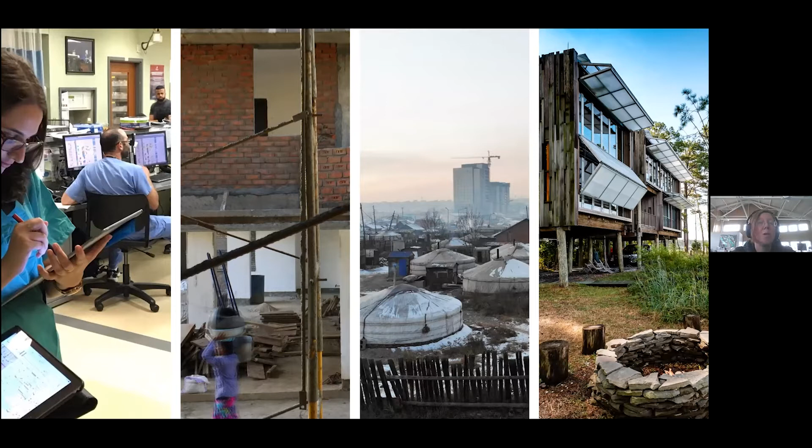So today I'm going to provide a very brief overview of the practice of KieranTimberlake. And I'm going to use 4 projects to discuss aspects of expanding our design agency through inquiry, which is why I titled this Research and Practice. But it's really expanding our agency through inquiry with a focus on outcomes. So these 4 specific projects really try to focus us in on what architecture in space can do.

And then I'm going to end by framing about 4 questions for discussion, and maybe really what I'm doing is I'm taking these 4 questions and lumping them together with your set of questions for a broader discussion.

So just a little bit about KieranTimberlake and how we're organized. As Billie mentioned, we are a transdisciplinary practice. We're known for architecture, but also for novel envelope concepts, creating hardware, software applications. We're also known for the analysis and studies that we do. We're known for basically creating knowledge for architecture, in addition to creating architecture. We've built a culture of inquiry, and we've established research as a project that requires strategic planning of people, time, and money to do that research.

Our research questions absolutely reflect an expression of how we think about design, architecture, and our agency. I say that specifically because inquiry as a mode of design is the underpinning of many practices, and it's deeply connected to design philosophy. We have matured a multi-methods approach that includes measurement, surveying, mapping, modeling, simulation, and prototyping. Those are all methods that we can use, connected to tools that we can use, but really our focus is less on the technical and more on the social aspects, recognizing that the technical is just something that we use to get to very, very specific outcomes for people.

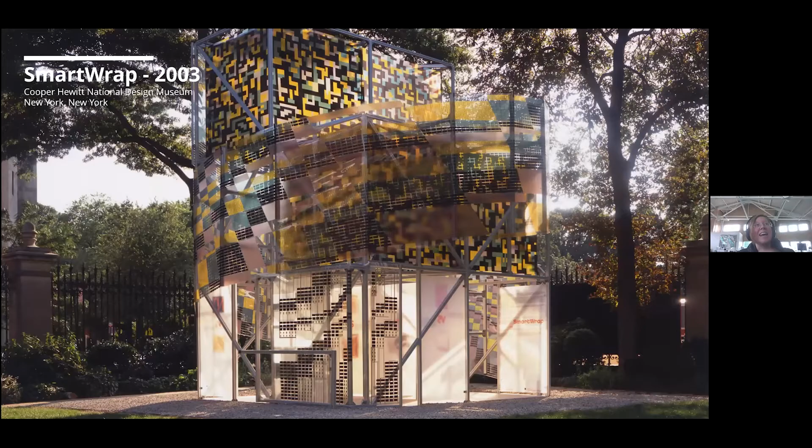Projects such as the US Embassy in London, and I'm going to go back in time a little bit here, the Cellophane House in 2008, and SmartWrap, represent more than a decade of connected research into the efficacy, adaptability, and performance of multifunctional facades. And projects like Multi-Scale Modeling or Ortlieb's Bottling House or Green Roof Vegetative Survey also embody our commitment to establishing proactive research test beds. You'll see that those projects are projects of ours, and we're trying to understand, explore hunches, and really deepen our understanding of the relationships between people, architecture, change over time, as well, again, as the efficacy of our design strategies.

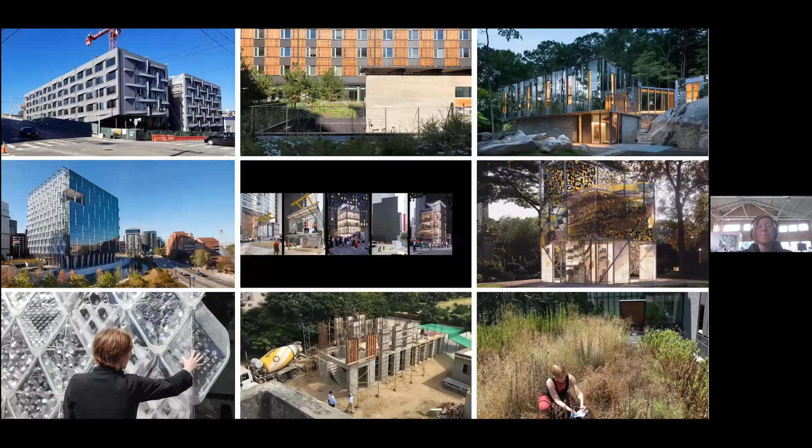And each one of the 9 projects I've just briefly mentioned, in whole or in part, represents the purpose and pace of inquiry in our practice, where day by day, we leverage inquiry to develop actionable insight into design decision-making. Month by month, we have processes here for proving new concepts that have the potential for practice transformation. Year by year, we develop new knowledge on the built environment through longitudinal studies where we set up projects and we study them over time. And then platform by platform, we choreograph new workflows that elevate our profession.

So today I want to discuss in a lot more depth than what I just went through. I want to really discuss 4 projects. I've picked these projects because I think they express aspects of our agency to engage inquiry in order to design for resilience, design for health and well-being, and to address climate action. These projects include emergency department occupancy mapping, Ideal Choice Homes, designing the 21st century care, and Tally, which is a software that models embodied carbon. I've selected them because they also express a need for transdisciplinary or inquiry-based design and a specific investigation into approaches for transdisciplinary and inquiry-based design.

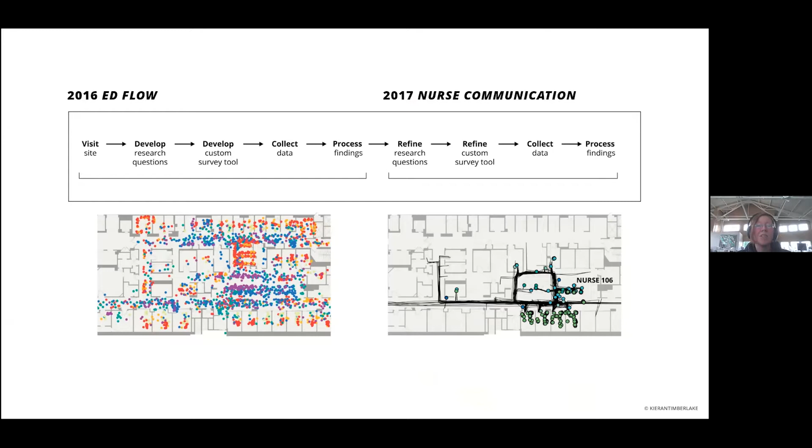Right around 2016, KieranTimberlake and Jefferson University's Health Design Lab formed a 2-year research partnership to examine this space that you see pictured here. It's an emergency department in Center City, Philadelphia. And you can imagine that this is an incredibly intensive, 24-hour driven space. And we were interested in understanding the experience of people in the emergency department, but we were really interested in understanding the environment that was there, the interface between nurses, patients, and physicians, and the overall experience of people in this space.

Caregivers here were concerned with the flow and function of the emergency department. So with the movement of equipment, location of individual rooms, circulation patterns, and overall ability to adapt to events.

In many ways, this was a found space. It's not a space that we designed. It's not a space that we planned in any way. It was a space that was really offered up as a space that needed some further study and a space that was being questioned along the lines of, does this space meet our current needs?

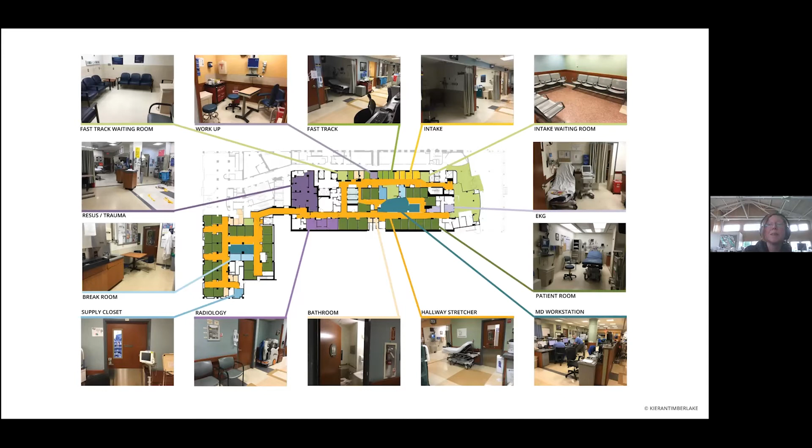So a little bit about the Health Design Lab. I think what's important to know about the Health Design Lab is this is a lab that is specifically set up to connect future doctors and caregivers to design thinking. So they work with a range of different professions, industrial design, architecture, public health, and look at the ways in which design thinking can be used within the field of medicine and caregiving.

And in this instance, we work with a team of medical interns, and we organized and built capacity for us as a team, architects and medical interns, to collaboratively survey and study the emergency department. So our ambition was to provide a new way to see the emergency department and to identify opportunities to improve it. And then a secondary goal was to understand the potential for rethinking the emergency department more broadly.

So we developed a tablet-based workflow where data was collected, it was structured, stored, and then analyzed using digital mapping tools. The survey was conducted amid the movement of people, equipment, as well as furniture and shift changes within the emergency department. And we used a geolocated set of floor plans that allowed for surveyors to zoom into maps and manually place individuals in space without relying on GPS.

Well, there's a number of types of technology that might allow for this kind of tracking. They weren't allowed here in this space. And so much of the work that we did to overcome these technical challenges had a lot to do with trying to find a workflow that fit this place to do the kind of surveying that we wanted to do.

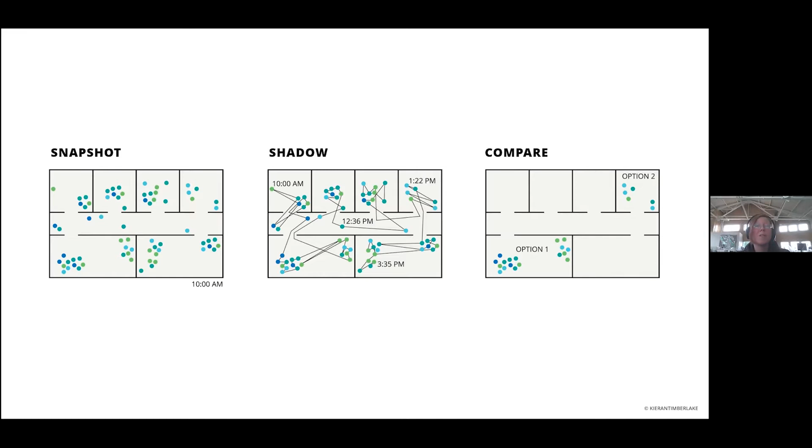We deployed 3 different survey approaches and then attached additional metadata notes or photographs to these individual data points. So for instance, a single point was used to represent the location of a stationary individual, while a multi-point line was used to represent the path of a moving individual. We also formed quantitative comparisons between different spatial configurations.

And with these methods in place, we were able to do ultimately what we wanted to do, which is to conduct research through targeted study questions, such as how does the occupancy in the emergency department change over time? And by mapping this trend, hospital staff gained a more holistic understanding of the emergency department. They were able to confirm the stories that they kept telling each other. They were able to confirm areas of congestion and identify opportunities for increased efficiency.

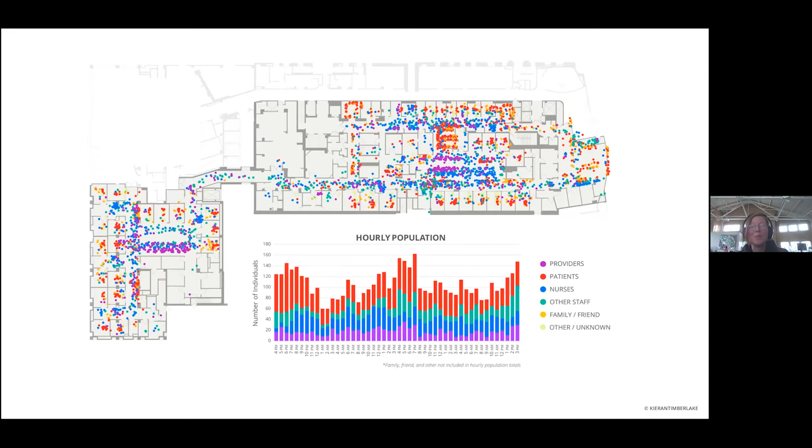And for instance, with this kind of data, the staff reimagined a replaced waiting room and a new placement for a waiting room in order to reduce congestion and patient wait times. We were also able to explore the question, what is the relationship between environmental conditions and patient experience?

So medical interns used a shadow approach. They tracked individual patients through the emergency department to understand a patient's experience over time. They simultaneously measured factors like temperature, humidity, light, and sound, and they were able to show variation in the environmental conditions per space type over time. And this mapping exercise revealed that some spaces in the ED were quieter or warmer than others, suggesting design improvements for better patient placement.

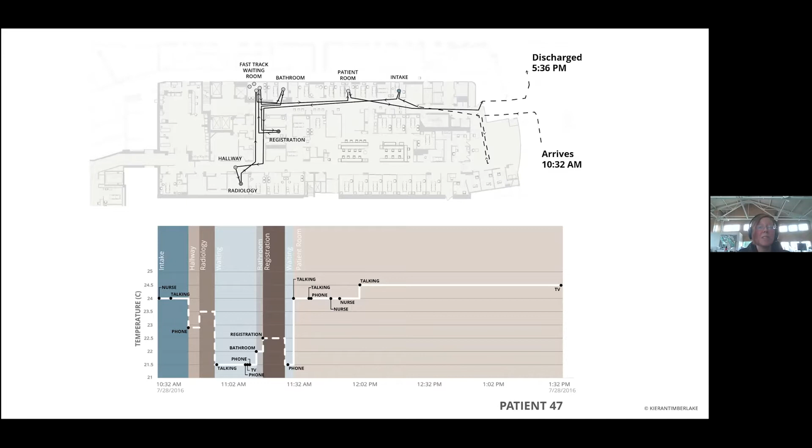And then finally, we explored the question, how is communication affected by different spatial arrangements? I should say that this question arose out of the first year study. So we did a field experiment in the first year in 2016, asked the two questions I just sort of posed to you, and then we were able to back up and say, what next? What else could we learn in this space?

And we really began to understand that there was a central question and desire to know something about how people communicate with each other in this space. What was interesting here is that we were looking at not one space, but many space types, and predominantly those space types being planned according to two different paradigms. So the emergency department is divided into two wings. There's the A side and the B side.

And the A side centralized layout concentrates a cluster of nurses and doctors in a workstation surrounded by patient rooms, whereas the B side's decentralized layout and individual nurse stations distance nurses from other hospital staff in order to situate them closer to patient rooms. So if you studied healthcare design or have some familiarity with these types of layouts, you can see that both of those types of layouts are connected to best practices for patient care.

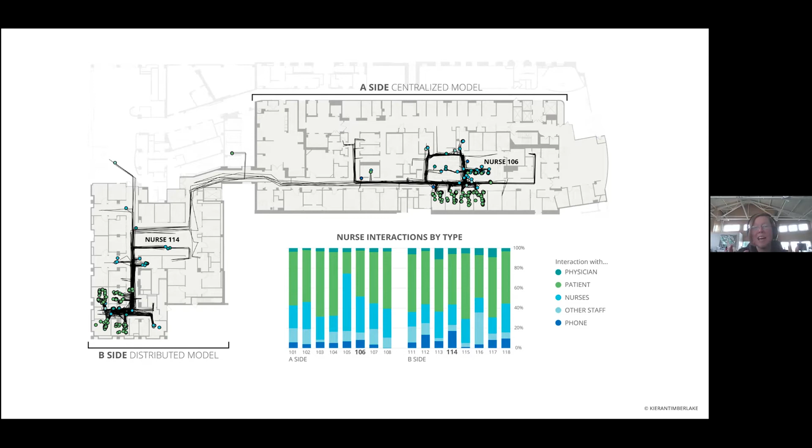The mapping that we did, which was paired with some statistical analysis, revealed that on average, the B side decentralized layout led to increased communication and contact time between doctors and nurses, despite the distance between their workstations. And that finding was, again, a finding that allowed this community to begin to have more explicit conversations about space.

But what is it about this ED study that I think might be of interest for our discussion? So really what the ED study does is it demonstrates some resilient design principles, but it also demonstrates that the emergency department and spaces like this are dynamic. This is an event-driven space, and it has to adapt to serve people with acute needs. And the recent need to meet social distancing guidelines and to separate COVID and non-COVID patients placed an even higher premium on the flexibility of this space.

But this study also demonstrates that post-occupancy evaluation, or POE, is an essential method to help us understand how a space actually functions. And when we understand how a space actually functions, that could be a flywheel for adaptation and an input for design. It also suggests that non-experts, building owners, students, staff, can be empowered to conduct research on their own space and to identify areas for improvement.

In this study, it was the medical interns and two doctors leading the medical interns that ultimately were leading the study inside the space and doing all of the surveying. And that was in partnership with deep discussions that we were having where after collecting that data, we would all get back together and really try to understand the meaning of that information. But nonetheless, it points to that need to empower people to really understand their space.

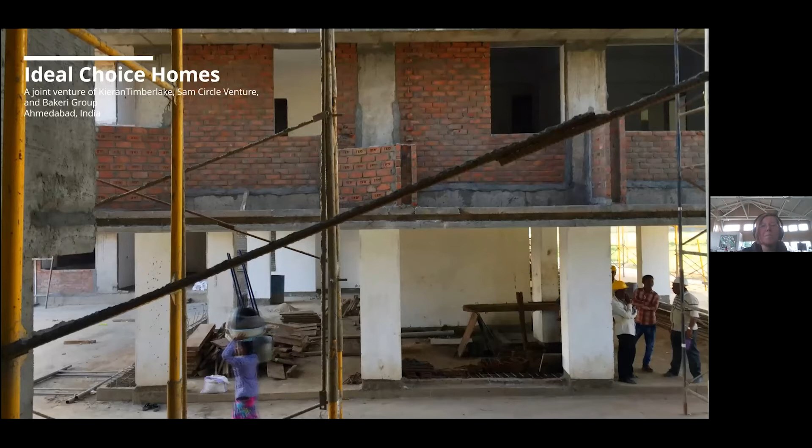The next project I want to talk about is a project called Ideal Choice Homes. This project was done in partnership with Sam Circle Venture out of New Delhi and Bakeri Group out of Ahmedabad. And this project addresses a significant housing shortage throughout India's cities. We started to engage this project in 2010 and worked on this project between 2010 and 2018. Really, in this project, the chief challenge was to look at existing construction technologies for single and multifamily housing and trying to understand the evolution of those construction technologies.

Some of the observations that were made by our partners had to do with the employment of wet masonry infill that was prolonging completion up to 24 months. And that prolonged completion was unable to keep up with the significant shortage of housing. We were also looking at material supply chains and construction technologies that likewise couldn't keep pace with demand. So in partnership with our India-based asset management company and development company, we aimed to design and engineer a whole building system solution. So this was very much about looking at building and construction systems to solve the problem.

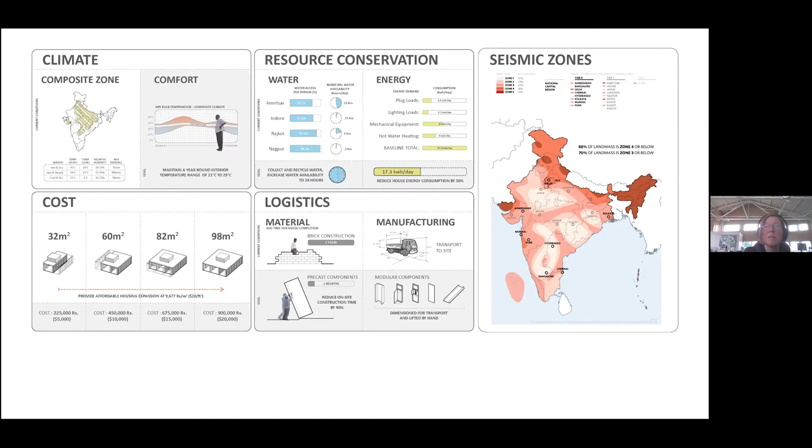The team's background research and analysis explored all aspects of India's offsite fabrication industry, including supply chain development, production capability, as well as housing and construction typologies, familiar room use patterns, material availability, seismic and air pollution risks, as well as labor and more. And the primary component of the system is a precast C-shaped concrete panel that has multiple integrated functions. It works both as a wall and as a column, as permanent formwork. It's dimensioned to allow reinforcing configurations for different seismic zones. And it's also dimensioned to self-shade from sun and monsoon.

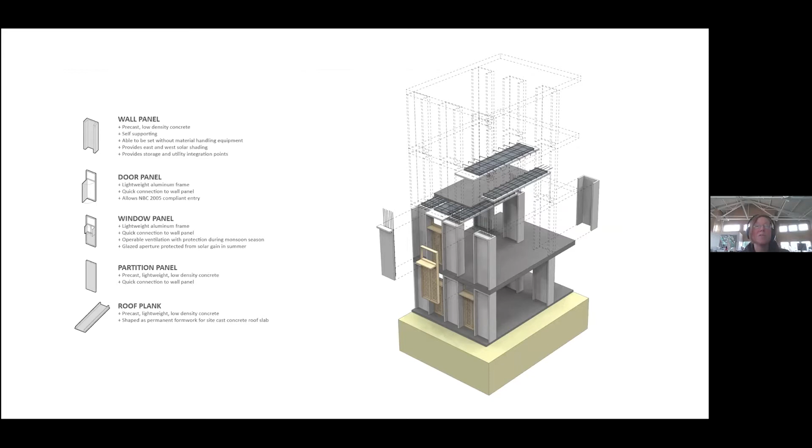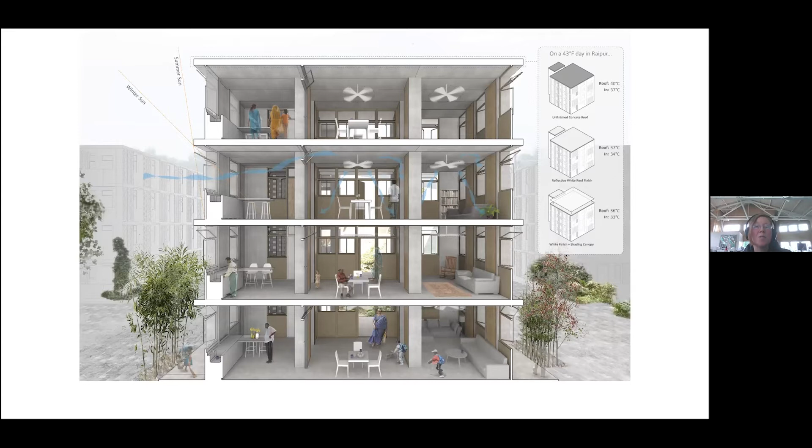And overall, one of the driving factors here was time, an attempt to reduce construction time from an estimated 2 years to 3 months by orchestrating a legible construction sequence. Likewise, we were looking at creating a system that could respond to a wide range of seasonal variation, minimizing solar gains through overhangs and shading during the summer, encouraging air movement through cross ventilation and minimizing air infiltration in the winter. And then also designing a system that could expand from a single bay studio to a 3-bay, 4-bay multifamily housing structure, and really engineering this system with our structural team as one that could anticipate further growth, such as the addition of a room or the addition of an entire floor.

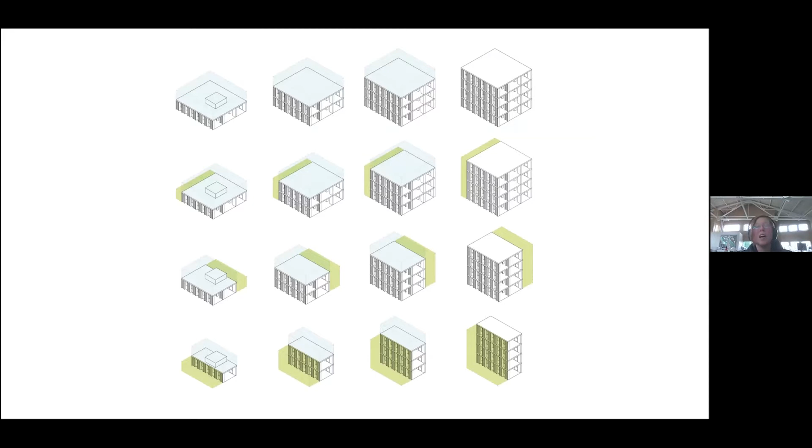So our development process emphasized a collaborative approach to prototyping, where we were prototyping here and with our partners in Ahmedabad. And we were addressing concerns about component weight, material availability, and fine-tuning several lightweight concrete mix designs concurrently with our partners.

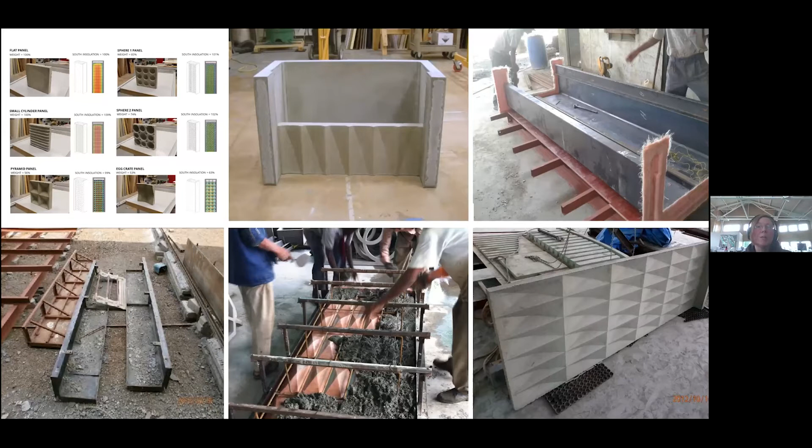We also were exploring formwork design, casting and demolding with small scale and high capacity precasters. So we were looking at the scale of production as well as the capacity to create these different elements.

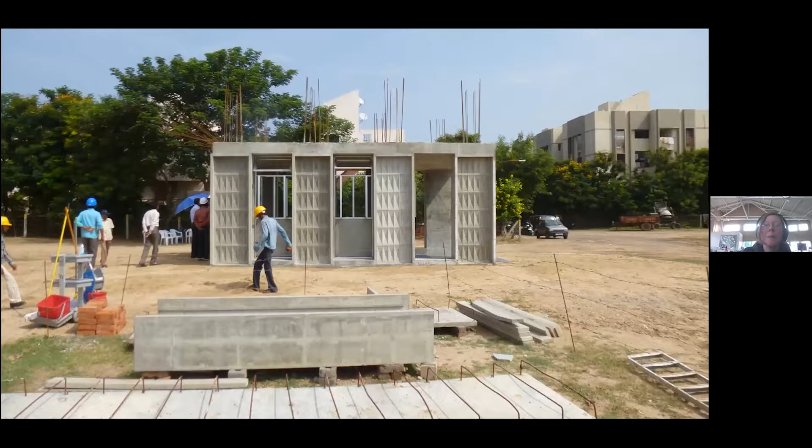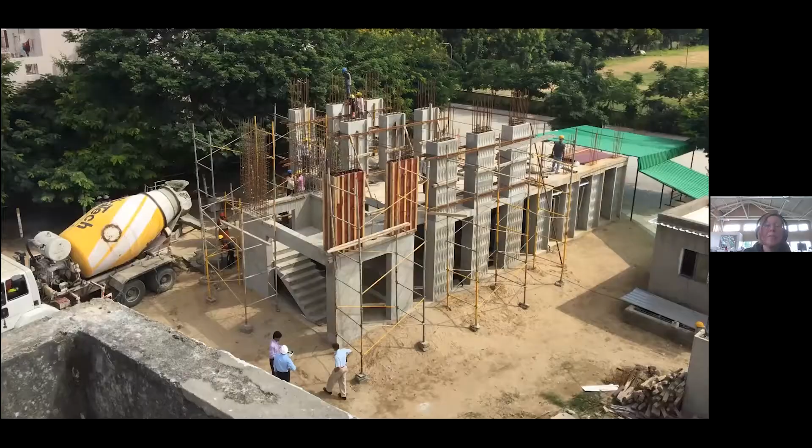And then we were also testing the entire system out, completing a first full bay prototype in 2013 that emphasized system legibility, material handling, assessment of individual components, time to build, and safety. And then a second bay prototype, which tested a higher capacity panel production, also looked at the horizontal expansion of the system, strategies for integrating electrical and plumbing services, infill materials, and interior finishes.

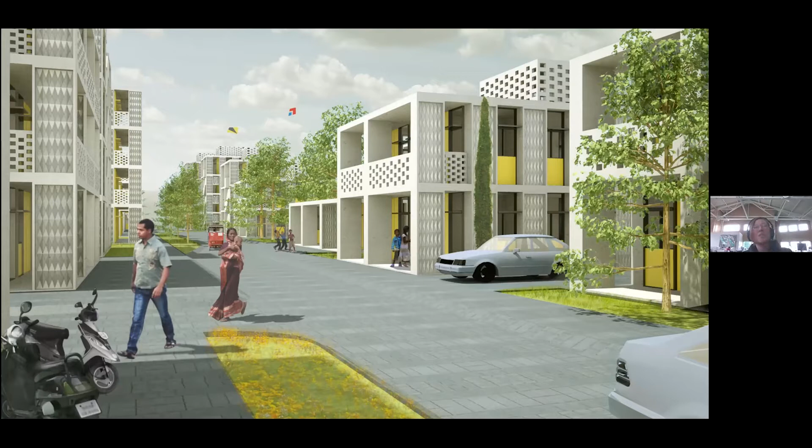So this project in particular demonstrates some very specific principles about expansion and contraction of systems, but also it embodies an idea about designing for robustness, the ability to situate a construction system and construction logic in multiple contexts. One of the most important contexts that we were trying to address here had a lot to do with the structural design of the system and the ability to address seismic contexts.

And then we were also working closely to design for growth and to look at the ways in which this kind of system might have the capacity to expand both horizontally and vertically. So in this instance, what you see is a system design, a speculative system design that we were testing through really a prototyping process, as well as a supply chain development and materials testing process.

Okay, so the next project I'm going to offer up for discussion is a project that we engaged as a small part of a much larger team. So this project was in collaboration with Ger Hub, an NGO in Ulaanbaatar in Mongolia, UNICEF Mongolia, UNICEF Global Innovations, Arc'teryx and North Face, as well as the Center for Environmental Building Design at the University of Pennsylvania and the National University of Mongolia, as well as 5 families who allowed us to come into their homes and to work with them to understand some very specific aspects of air pollution in Ulaanbaatar.

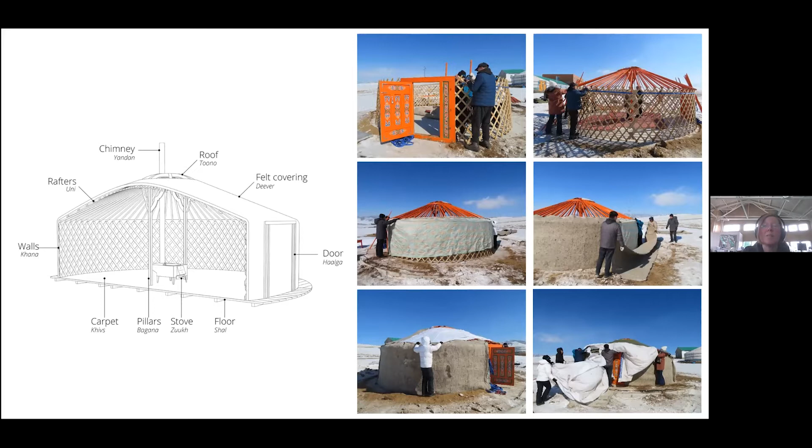So what we did is we implemented a 1-year program of design exploration, and we had to kick off that 1-year program in such a way that we were able to see ahead to the time in which we needed to actually implement these interventions in order to be able to measure the outcomes associated with those interventions, respective of the cycle of weather that's happening in this place and the cycle of construction that happens annually.

So we started out by surveying material culture of ger construction and learning from residents primarily about how they design, how they build, and how they maintain their home. Even though the ger, when you looked at those previous slides, you could see that there's different layers that go around the main frame, and that we're talking primarily about felted materials here.

They sort of have this kind of image of looking the same. In talking with families about how they maintain their home, what you're going to find is that they're not all actually the same. Different families have different ways of putting different layers in different positions, of preferring different methods of treating the ground and treating the wall. And so we really wanted to learn from residents about how they design, build, and maintain their house.

We also worked again with the five families I mentioned in the ger district itself to monitor and measure individual gers and develop a baseline understanding of the ger's thermal performance. So we were looking at in situ measurements that would give us some sense about how the ger was occupied and how the coal stove that you see there in the middle was fired, when it was fired, what was the temperature inside, what was the temperature outside.

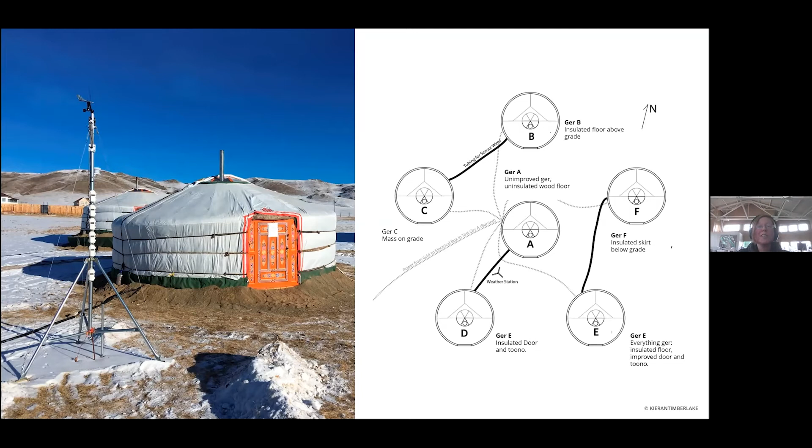And then simultaneously, we established a test bed, which we dubbed the Ger Ranch, where our team monitored and measured the effectiveness of selected interventions to make recommendations and introduce new construction techniques at a much larger scale. So the Ger Ranch consisted of 6 experimental gers, in which a series of prototypes for the door, the roof cover, the floors were evaluated over the course of a winter. The prototypes included an insulated door covering, a roof covering, as well as 3 variations for the floor, which either coupled or decoupled the floor from the ground.

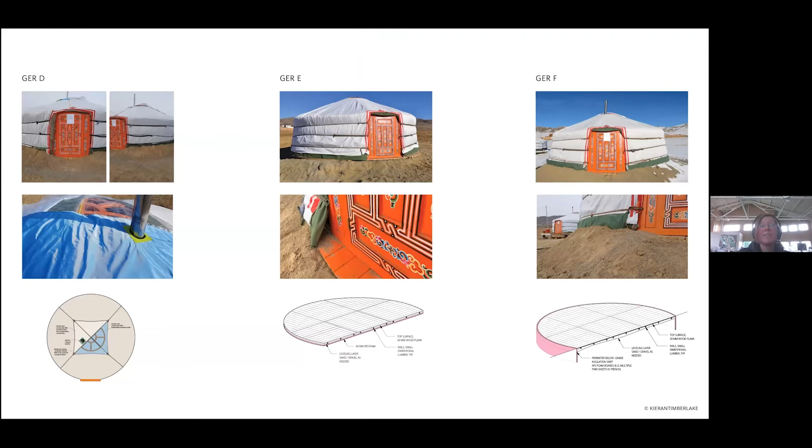Each ger was also equipped with continuous recording of temperature, humidity, CO2 levels to evaluate thermal behavior and analyze the effects of these various improvements. And heating was provided by electricity for a designated series of weeks. But we also, of course, in the Ger Ranch tested coal stoves. We were interested in sources of heating. We also were able to test a number of variations by removing insulation, adding insulation, and using other methods of ventilating the ger. The Ger Ranch was monitored over a 9-week period.

We had a very, very short window to get this implemented and monitor it. But between December and late March, we were able to gather some actionable data and really identify primary pathways for heat loss, while also understanding what it meant to improve the ger and to meet these near-term goals. The result of the study showed that it was possible to improve the thermal performance of a ger through simple, cost-effective measures. And since the conclusion of this study in 2019, over 100 gers in a regional town in Mongolia, and this would have happened this past year in 2020, had been deployed with a modified version of one of the gers in the test bed.

What's I think really important maybe for our discussion here is we're looking at the Mongolian ger, which is a 2,500-year-old building technology that is highly adaptive to change in its context. And much of the knowledge of both ger construction and operation is tacit. Adjustment happens seasonally as a new layer, a skirt, or a vestibule is added or subtracted. And this highly resilient construction technology is now adjusting to the ger district, which is a new system of planning that directly reflects the regional impacts of individual buildings and the needs for systems to consider individual human health impacts.

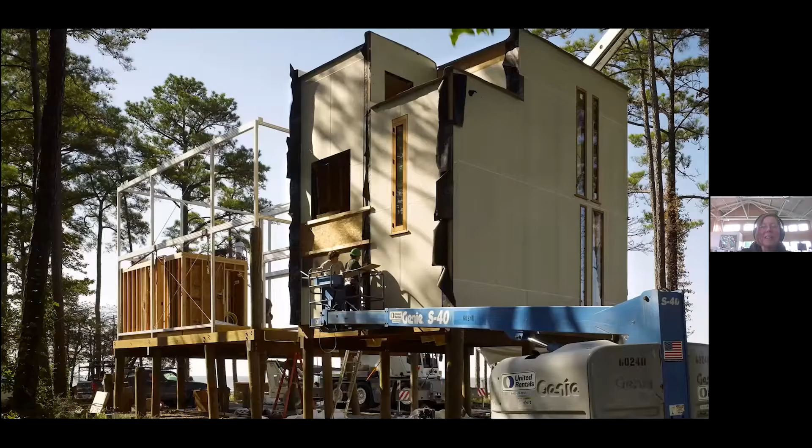We don't know when. The house, which was fabricated off-site and then assembled on-site, can also be fully disassembled. So its components are designed and engineered to retain value. The house is designed for disassembly, and it does anticipate the site's restoration at some unknown future date. The house makes a bid to directly and proactively engage change over time. And in 2008, to play out this scenario, we wrote a specification for disassembly.

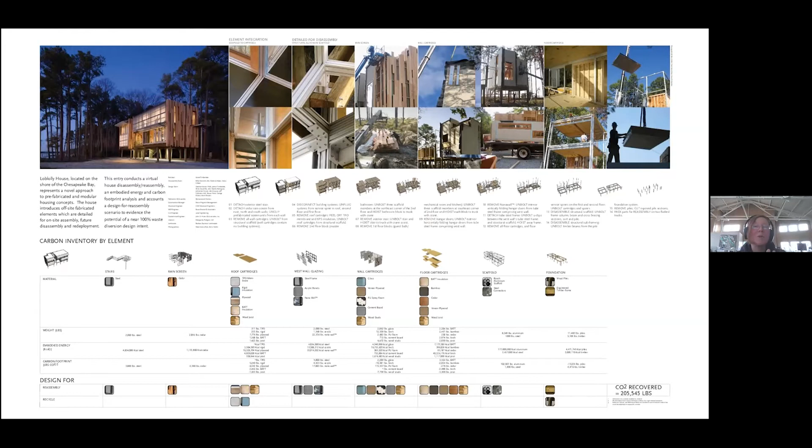So to understand the value of recovered materials, we calculated the avoided burden of additional CO2 emissions. And that was a back of the envelope calculation that was the initial spark for what is now known throughout the industry as Tally, the first life cycle assessment application that lets us calculate the environmental impacts of our building material selections directly in an Autodesk Revit model. And we know this about material and material impacts, or we have a growing understanding, especially in 2020.

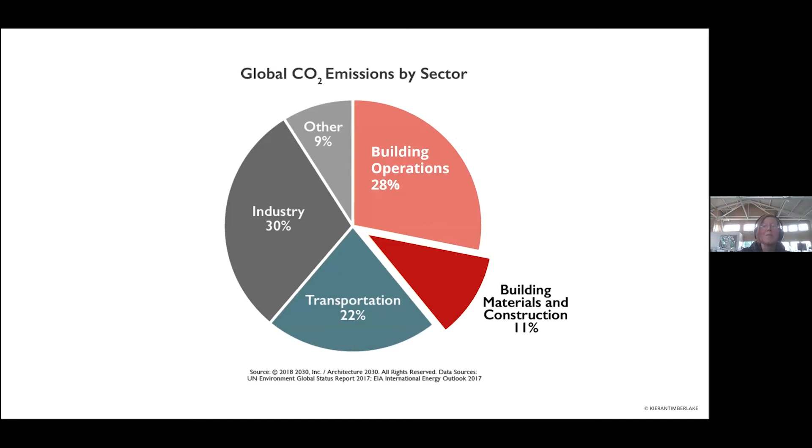There's been so much discussion around material impacts. Buildings and infrastructure account for nearly 40% of all global CO2 emissions, and over a quarter of those emissions are from carbon embodied in building materials and construction. And although this seems like a small percentage, as emissions associated with building operations go to zero, the source of emissions associated with materials matters more and more.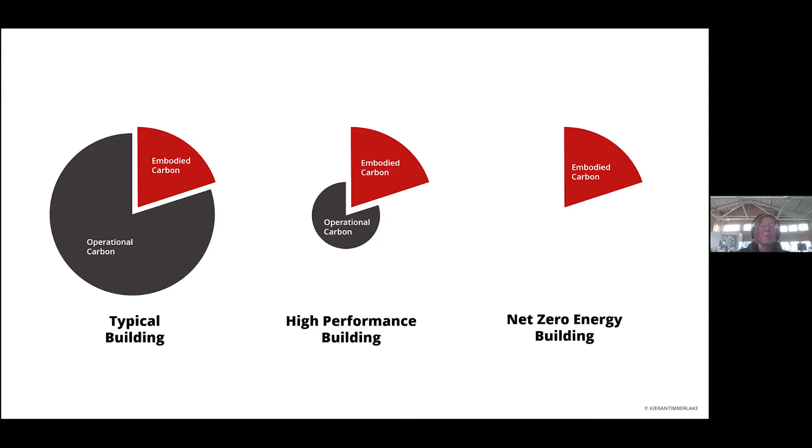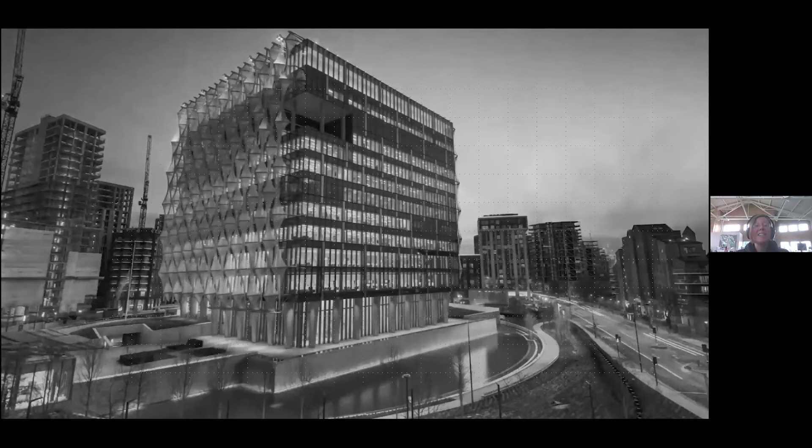So what we're talking about is embodied carbon, and it is the CO2 emissions associated with materials and construction processes throughout the whole life cycle of a building, which includes materials extraction, processing, manufacturing, transport to site, construction, use, replacement, deconstruction, along with benefits from reuse, recovery, and recycling. And that's in contrast to operational carbon, which is the CO2 emissions associated with the energy used to run the building. So together, embodied carbon and operational carbon form a complete picture of the carbon emissions associated with buildings.

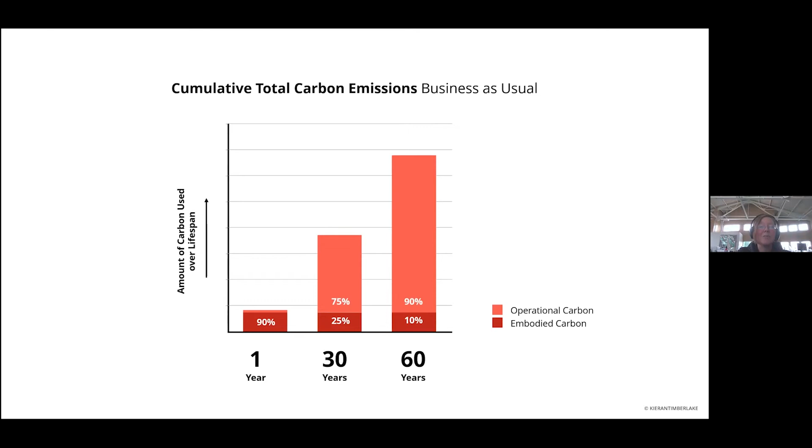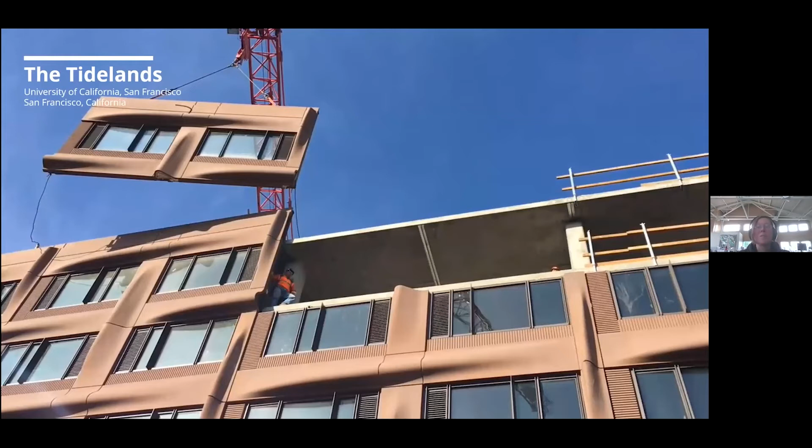So Tally, where does that come in? You can use Tally to model and measure environmental impacts, specifically embodied carbon. And furthermore, you can integrate carbon modeling into all phases of the design process, and these models can and should inform design decisions. So for instance, some examples from our own body of work. At the Tidelands, a project I mentioned at the outset, carbon modeling informed decisions on interior finishes, envelope, and structure. And in collaboration with our structural engineering team, we made significant embodied carbon reductions on the building structural system using

low cement content concrete. At North Campus Housing, carbon modeling was used to study assemblies and whole building design options throughout all design phases. And here we were able to learn about the role of carbon neutral materials such as wood and the need to scrutinize the embodied carbon associated with other material categories like concrete and metals. And at Ortlieb's Bottling House, which is the space I'm sitting in today, the deep retrofit of this 1940s beer bottling facility, which in 2015 became our home, proved that building reuse is one of the most effective strategies to tackle total carbon. And our calculations suggested that it would take 183 years of building operations to equate to the embodied carbon that we saved by retrofitting this historic fabric of the city.

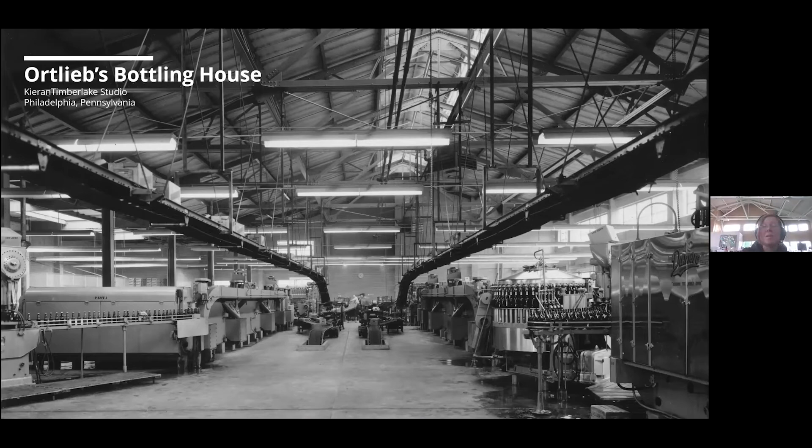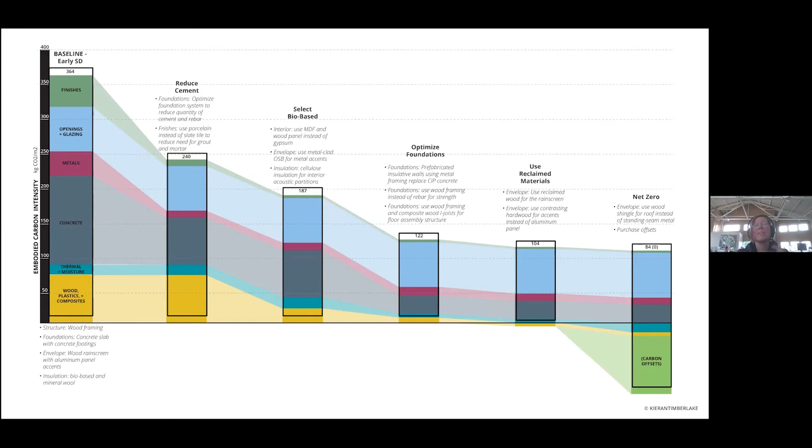And finally, for KT Open Home, which is a new offsite housing system that we're developing right now in partnership with Bensonwood, who was the original fabricator of the Loblolly House, we've integrated a path to net zero embodied carbon, and we began to do this with a lot of our projects. That includes options for systems, design, detailing, and material procurement, a discussion that we're actively having during the design process. But what does all this mean?

I think for us, when you look at Tally and you look at these practices, really we're much more interested in practice transformation. And we know that a building causes impacts far beyond its building site, and that we have an ethical obligation to tackle climate change on every project. The purposeful design of low or zero embodied carbon solutions demonstrates that building level decisions are directly connected to global climate change mitigation strategies. And furthermore, these new modeling practices require us to intentionally make changes to our own design practices. And yet, when we engage in new emerging practices, it opens up a space for a lot more conversation.

So in talking with users of Tally over many years now, and especially within the last year and a half, we've been collecting the next 10 things to tackle. And there are so many of them. What's the state of the question? What's the state of the data? What's a good number? Where should we be? These questions go on and on. The one question that has come up repeatedly is, yeah, we're talking about global impacts, but many of us are now curious, when we're using data like this, the data is not specific to our communities and not specific to places and spaces. So if we're going to look at these issues of material impact, how do we do this in such a way that it does address robustly issues of environmental justice?

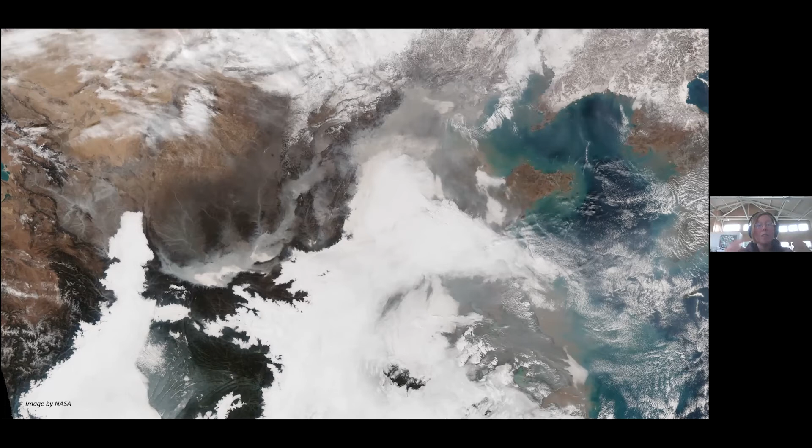So I think one of the first questions that I always carry with me is where is the system boundary of architecture? Do we carry around in our heads this idea that architecture begins and ends with a wall, or is that system boundary greater? If it is, how do we engage it? And how do we, through our own practices, begin to engage it robustly?

But I also think that in our work, you see another thread of conversation, which is around this topic of who. Who are the designers, or who are we in conversation with? And I encapsulate that in this question of who, and with this question of what does it mean for us to pursue transdisciplinarity now? And I use transdisciplinarity in a very specific way.

Yes, there's lots of disciplinarities, but I've begun to realize in reflecting on the last decade of work and speculation on transdisciplinary practices in 2008, that was part of my transition from full-time academia to the practice of KieranTimberlake. We hypothesized that we needed to work with other people's knowledge, we needed to engage people in conversation, and we needed to really look at the gaps and seams between disciplinary bound knowledge. And over time, we began to work on those gaps and seams and develop a better understanding that design is one method of inquiry among many methods. And how do we build up those conversations?